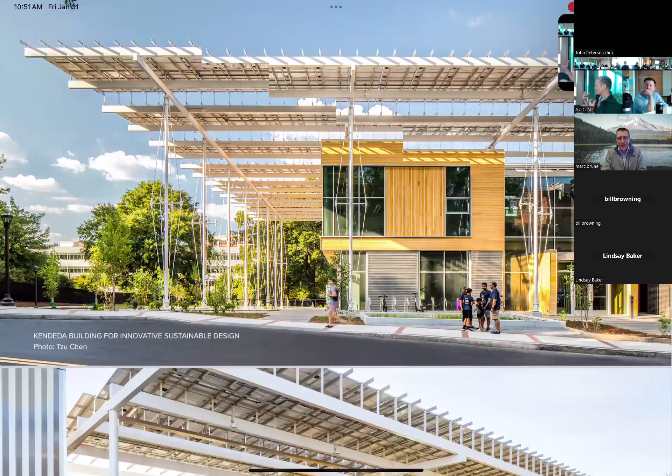One of the real goals of our particular center is to be a resource for the larger community beyond just Oberlin College. This fits really well with that narrative, and with demonstrating something I know other communities are doing, but I don't think is being done in Ohio, of load profile managing. We'd be a drop in the bucket in terms of the load of the city, but just being able to demonstrate this concept would have enormous educational and community value.

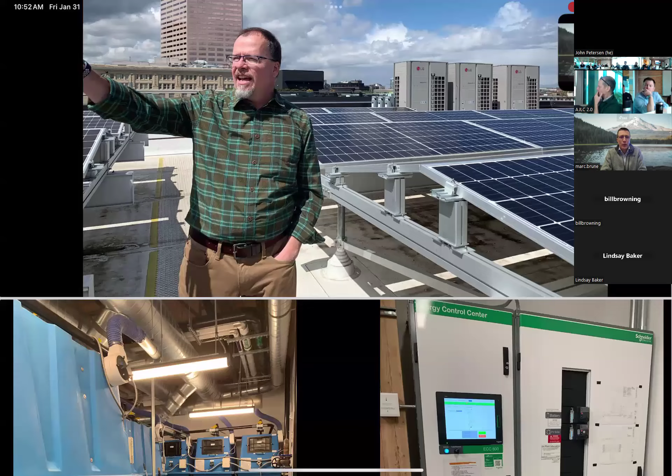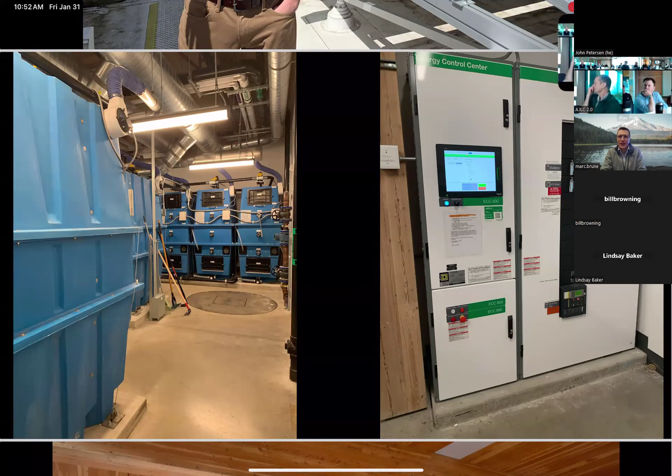It's funny, the drop in the bucket idea. It's kind of what I was getting at earlier, thinking about how the AJLC, without me ever stepping foot in the building, had a pretty significant impact on my career. Some of the decisions I made happened because of this building, or at least were guided gravitationally by it. The things we do on some of these structures get noticed, and people go on and do things because they learn from it. So there's a ripple that's much larger than the actual effect of one building.

I could just jump in, sorry. Super excited about this particular route, because Amory Lovins has been talking about it in Reinventing Fire, that the future of electricity would involve not just renewables, but storage, district energy, microgrids. These are all part of that future vision.

Personally I'm excited, and also I think there's tremendous pedagogical opportunity, because in my energy and society class we talk about storage, but there's nothing to show. If I could take students to actually demonstrate how it works, maybe even design assignments out of that management of the grid, it would be super exciting and beneficial.

I just pulled up these pictures and can take them back down again in a second. These are pictures I took. On the right is the microgrid in the PAE building. On the left is their composting system for the wastewater. That's what the blue bins are.

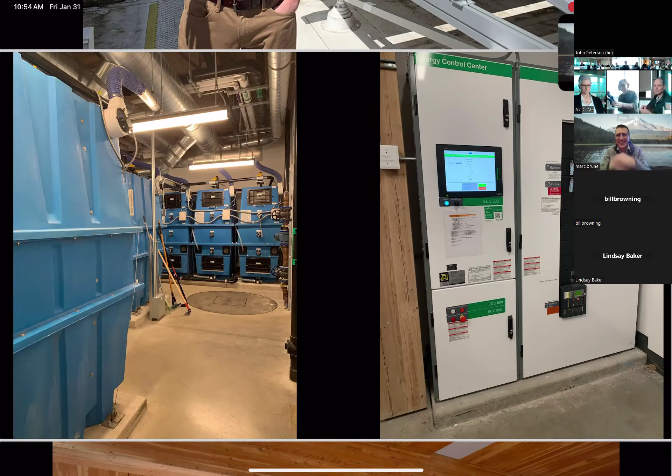Are those blue bins generating energy? No, I'm just showing it because I have some slides. I was just curious if that was the energy system. Those are the exact same units we have in the basement next door, just a single unit instead of them in series.

And that's just compost. Here's Paul on the roof. Those are the composting toilets, and a cool way that they oriented the PV. It may seem a little counterintuitive if you're thinking about solar access, but it allowed them to pack more under the roof. And this is the whole building here. So this is not an impractical building, not a super granola building - it's a real office building in a downtown area.

I'll stop sharing these slides now. So Lindsay, that roof is what's capturing all the water used within the building? Yeah, a couple things I guess unique about this - that's our water capture, and there's a 70,000 gallon cistern and then a water treatment system. We've been drinking the water for a year and a half now, and so far, so good.

Yeah, the water systems have worked really well. The solar on the building is 133 kW, which is about half of what we needed for our office building. So we made a donation to another building about 5 miles from our site, also in the PGE grid - it was an affordable housing building. We gave them a 215 kW array as part of the development of our project, and then wrote a contract that the renewable energy from that is associated with our building. We buy some power from the grid, and we buy renewable energy from the grid, so there's not enough renewable energy to go around, but there was enough additional energy to power our building.

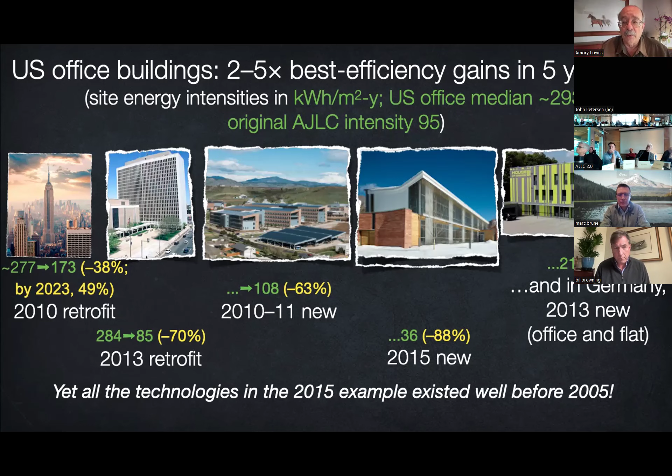And yet, notice that all of these technologies existed over a decade earlier. What mainly improved, doubling the potential efficiency targets for new and old offices in 5 years, wasn't technology so much as design—the way we choose and combine technologies. So don't think it's only about the hardware.

Of the 20 most efficient commercial buildings in North America, that RMI Innovation Center is the most efficient we know of in the 2 coldest climate zones. It uses about 1/9 the normal amount of energy. It's 1/10 bigger than your center and 16 years older.

Younger, I should say—we moved in 2015. And like my house, it's passive net positive and essentially no mechanicals, just some air-to-air heat exchangers.

It keeps people cool by 11 and warm by 10 passive methods. My favorite space is the Nega Mechanicals room, about 270 square feet, where I want to sneak in one night and outline on the floor in yellow industrial tape, like bodies at a crime scene, where the boilers and chillers were supposed to go before we designed them all out.

We expect this building's cost premium and under 4-year payback would drop to about 0 with wider experience, just as happened in Germany's passive buildings. Lots of interesting features, quite a few of them are potentially retrofittable. And I mentioned...

this Bavarian building. Our Innovation Center was the first passive house premium in North America. This is the first in the world, in southern Germany. What's interesting here is the rooftop solar cells make nearly 5 times as much electricity as all 3 stories use.

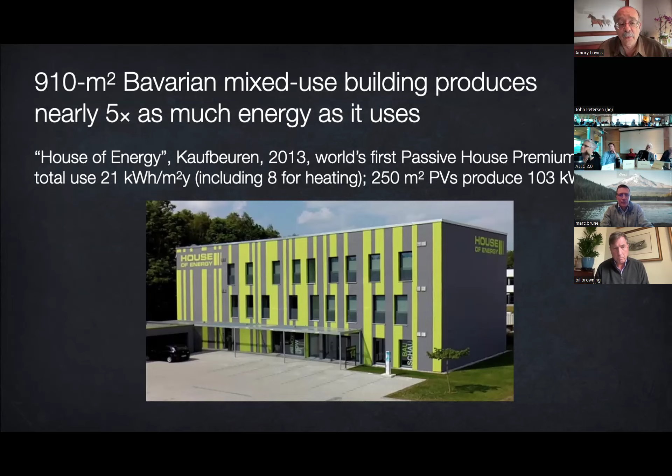And now for opaque walls, we have the Dutch Energiesprong super-outsolation technique, scaling in 6 countries and often bringing old masonry buildings to net zero performance with extended life and comfort. Now, it's a long time since I visited your campus, so I don't have the recent performance data handy.

I apologize, but it was interesting to read that originally your site energy use for the center was about 30,000 BTU per square foot year, a bit over half of that going to mechanical systems. Well, that's nearly 4 times what this 4,000 square foot house office research center was using. Probably now we're using more because there were 5 years of...

pandemic and supply chain screw-ups getting the last greenhouse reglazing done. So we're still waiting for a new blower door test and recalking this spring. So we have substantial air leaks that may be doubling our electricity use, but we're still net positive, and that includes a couple of EVs thanks to 18.5 kilowatts of rooftop PVs.

But so you started at 30, or once you switched out the boiler for a heat pump, you ended up with a net of 14. Again, in the early days—I don't know now. And we were about 8 when you built. And of course, net positive once we count our rooftop PVs.

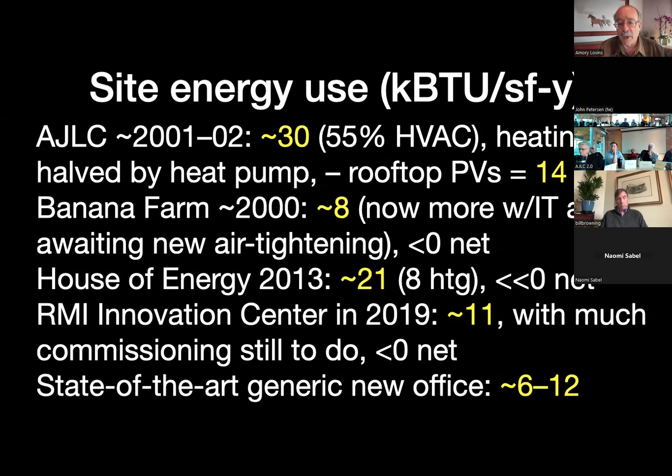I think reasonable energy goals for a good retrofit would include net positive and not dependent on grid power. Let me quickly mention that everything is progressing, so I would hope to get rid of any compressor-driven mechanicals.

Just be aware that in Singapore for 20 years now, Eng Lock Lee has been tripling the system efficiency on the design day. About 4 years ago, I asked him how much better he could do. So he redlined and found that factor 3 improvement could now be about a factor 5.

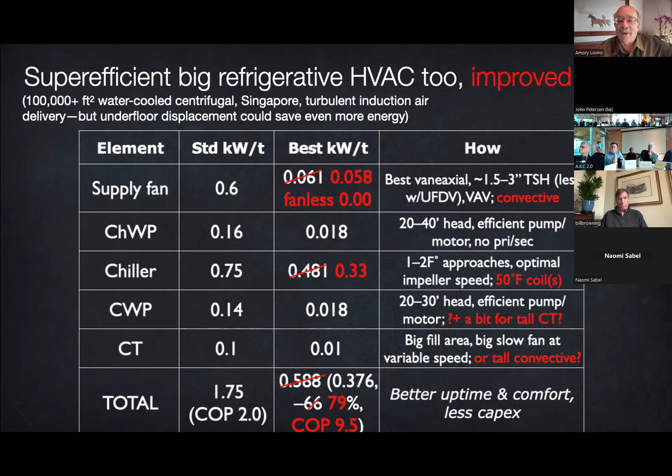What's next? Well, first of all, about half the remaining cooling system power in Singapore could be saved by underfloor displacement ventilation, plus a passive latent heat exchanger, which might be a good idea in your summer climate. It passively recovers the dryness of your conditioned exhaust air. It's not hard to do.

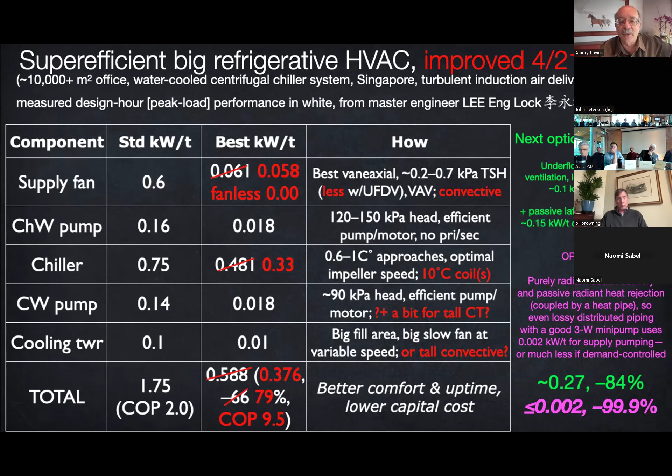And even more radically, delivering cool radiatively could probably cut your total cooling power to about 1,000th of standard practice, with much lower capital cost. Let me just say a word about how that works.

It's a really important innovation discovered by a Princeton team 6 years ago. They showed that outdoors in Singapore in January, which I think is worse than Oberlin in August, they could keep people comfortable in those tropical conditions without drying, cooling, or significantly moving the air. Instead, they cooled people almost purely radiatively, plus a little natural air movement, by absorbing far infrared radiation from their bodies into vertical panels subtending a big solid angle and cooled by a dense capillary mat circulating slightly cooled water.

The back of the panel is insulated and painted white to reduce unwanted solar heating. Then to prevent convection to and condensation from the ambient air, the front of the panel is shielded by an air gap and a 50 micron polyethylene film that's transparent to 82% of the infrared that your body radiates.

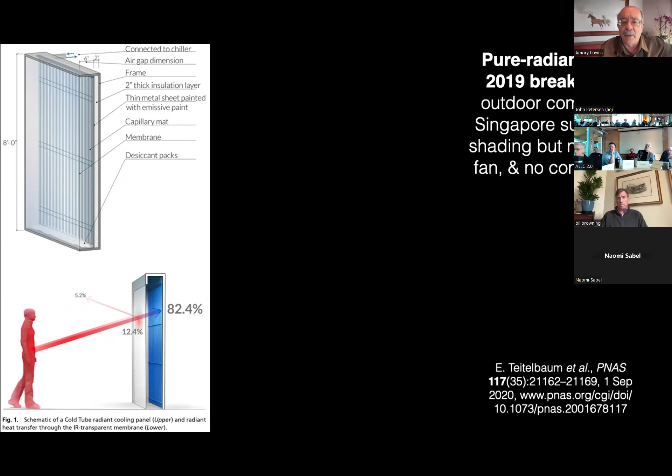So with muggy, nearly still ambient air at 85 F, comfort required supply water at just, I think it was 75 F or thereabouts. People inside this walk-in pavilion, about the size of a bus stop shelter, confirmed that they felt comfortable using classical comfort theory measurements.

They had to extend the psych chart to show the result, but it turned out that mean radiant temperatures from the water around 73 to 77 F could deliver comfort up to 90 F ambient at 80% relative humidity.

Now, of course, radiative cooling, typically from ceilings or beams, is common in today's most efficient buildings, but it was previously thought to need tight control of indoor humidity to prevent condensation. This demonstration shows you need only keep humid away from cool. A little plastic film does that.

Air handling in a radiatively cooled indoor space can then depend just on ventilation and health, not on cooling. We did that trick also in our innovation center, so the ducts got 4 times smaller. We're only delivering fresh air, not cool air — much less airflow, energy use, and noise. This may be the biggest discovery in comfort since Willis Carrier invented refrigerative air conditioning in 1902.

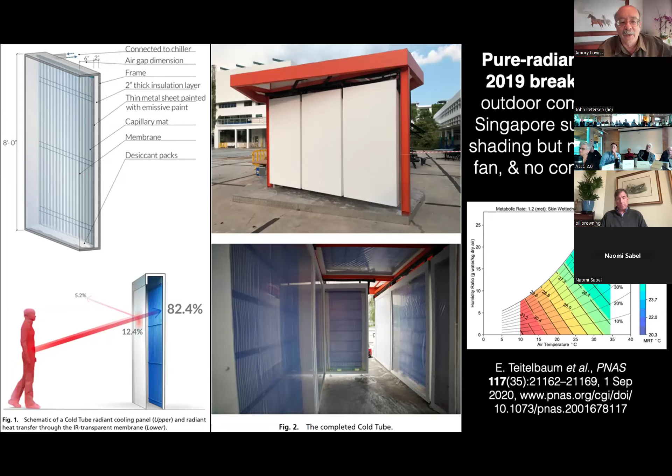So without going into detail on all the international benchmarks we've assembled for performance targets, I think it's clear there's a lot to do. And that also means sweating the small stuff.

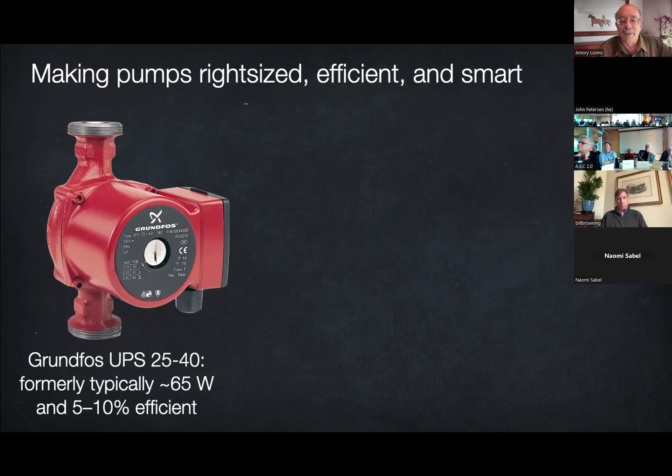Europe has 120 million pumps circulating hot water in houses, and they're 5 or 10 times bigger, 4 to 8 times less efficient than they should be. Many run all the time. They use 15% of the home's annual electricity, but now you can make them efficient, right-sized, self-controlling, and that would save 1/6 of Europe's Kyoto obligations — 8.5 gigawatts of power plants.

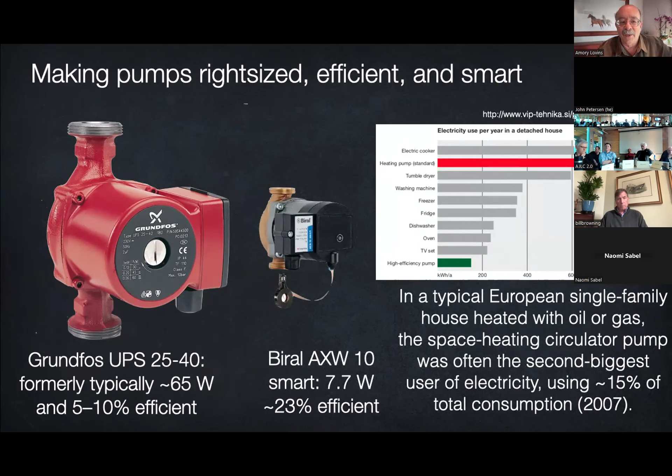Even though your daylighting is very good, I expect there's more room for improvement in lighting equipment and controls. And I wouldn't be surprised if your energy use intensity could get down in the single digits of barbaric units with even better comfort and occupant satisfaction.

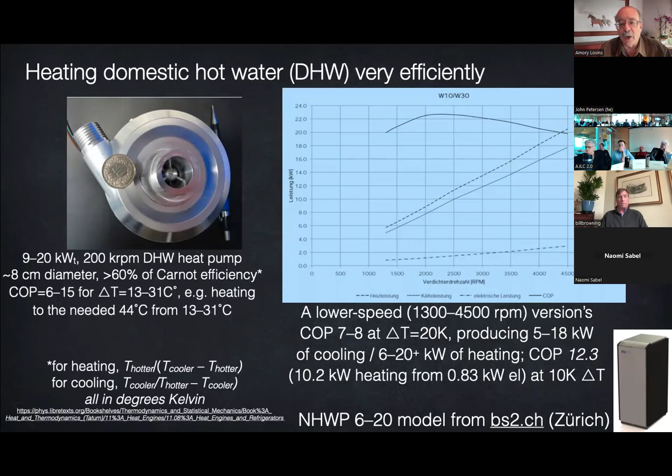That would be a wonderful demonstration experience, source of rich pedagogy, especially if it spawned continuous improvement and not just a quarter-century retrofit. And I wonder, maybe you've done this already, if you can increase your indoor junglification in line with what we've been learning about biophilic design from Bill Browning and others — this wonderful new book, Nature Inside.

At our banana farm, the iguanas, snakes, African pygmy hedgehog, and singing frog have died of old age. I've been too busy to replace them yet, but you may notice a bunch of friendly fish along with our meditative family of taxidermically challenged orangutans to cope with banana emergencies when all 6 trees fruit at once and suddenly we have a quarter ton of ripe bananas. Happily, our orangutan family has not yet learned spearfishing like this wild friend in Borneo, but at least if you fall in the pond, you can get a helping hand out.

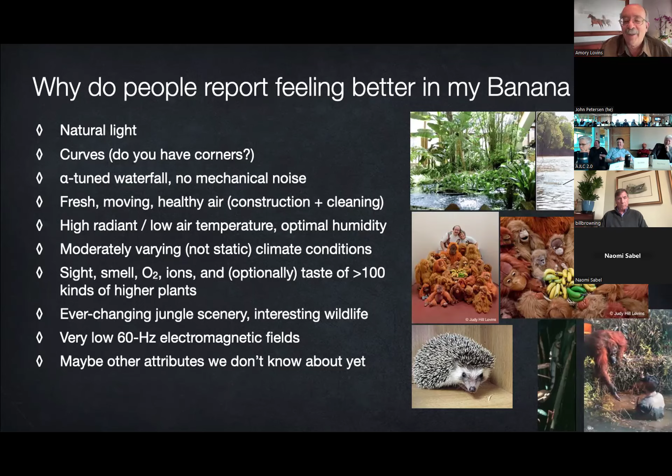So what next? My information on the current status of your center is old and sketchy, but my impression from afar is that you're blessed with a unique, brilliantly conceived, expertly executed, widely acclaimed aging asset. Based on our experience with the banana farm, now 41 years old, my bias would be to build on what you got, and with strong student engagement, make it a living lab of the latest and best practices—not just catching up with today's state of the art, but setting up to improve continuously into your long future. There is no end to the improvements you can keep making and the value they can continuously create for your mission, your community, and world. You're really fortunate to have that opportunity.